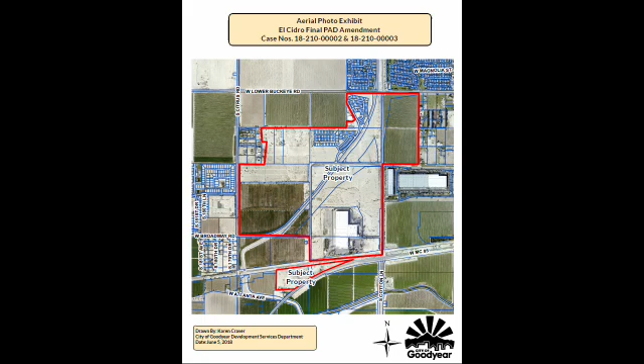The El Cidro PAD, to start with the big picture, is the property outlined in red. It extends from Lower Buckeye on the north to south of MC 85, and from Citrus on the west to west of Cotton Lane on the east. This is the land use plan for El Cidro, primarily residential with some commercial, industrial, and mixed use.

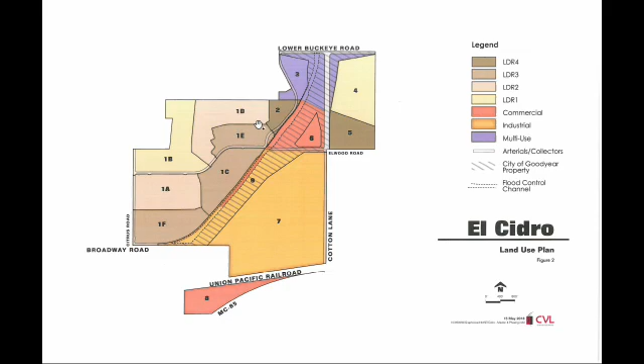Beazer Homes has purchased parcels 1D, 2, and 3. The amendment they are requesting is in just a portion of 1D. Using the same boundaries as the previous map, this covers all of 1D, 2, and 3, but the 18-foot rear yard setback reduction from 20 feet they are requesting is only on this parcel, which is actually phase 1A of parcel 1D. So out of everything on the aerial, the amendment we're discussing tonight is just within here.

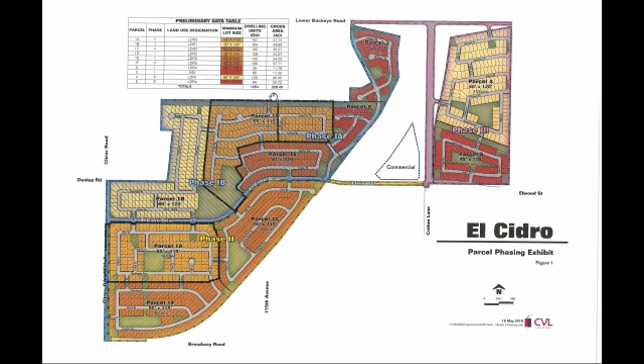This is the land development standards for all the residential. They are proposing, just in this one area, to reduce the rear yard setback from 20 feet to 18 feet on parcel 1D, phase 1A. As the footnote shows, this will only apply to one-story homes. They have a new 75-foot long product that won't fit on the lot from the front setback line to a 20-foot rear setback, so they need to encroach 2 feet and have an 18-foot setback. All their two-story homes will remain at the 20-foot setback. So just that one section of the table is pertinent to this amendment tonight.

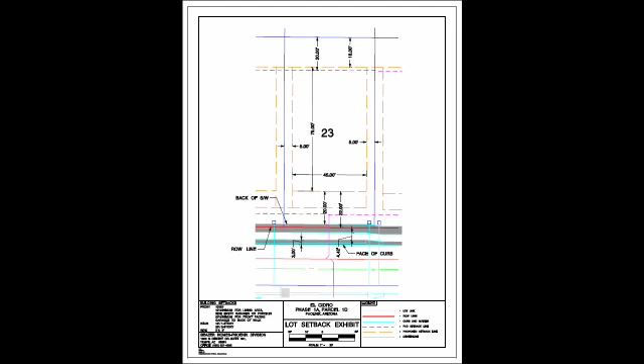This is a graphic showing what it's going to be. Rather than being at the 20-foot setback line back here, the home will go to the 18-foot setback. Because we are pleased there's going to be another home product added to the diversity of products offered in this community, we are supportive of this change, and we hope you can support it as well.

As Katie said, this allows us to continue separating out the two staff reports from the one, and the ordinance stipulations, getting those all separated as well. For this individual item for Beazer, we are hoping to move forward so they can go to council before break and get this approved, so we can add to the diversity of homes in El Cidro. I'd be happy to answer any questions.

Are there any questions for staff at this time? No. I take it the applicant is present.

Would the applicant like to speak or address the commission at this time? For the record, your name and address, please. Jeff Bliley, 701 North 44th Street, Phoenix, Arizona, here on behalf of Beazer Homes.

I want to clarify one reason we're doing this: we've done a number of PAD amendments on El Cidro, and a few years back one stipulation was adding detached sidewalks to the project. Originally it had sidewalks attached to the local streets, but now there'll be a boulevard, so it's detached. That caused the need for this, because the front yard setback is measured from the back of the sidewalk, and creating that 4 to 5 foot boulevard pushed the sidewalk farther up. So the options were to reduce the driveway length.

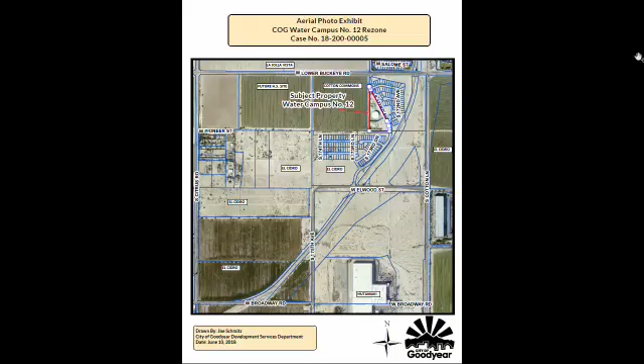So to give you a perspective, this is the Water Campus site originally, and the area immediately south was going to be platted with 11 lots around a cul-de-sac. But the city purchased the property before the final plat was finalized, and so that existed as Tract F, part of Parcel 3, and that's what the city acquired. You can see where it fits in with the balance of the El Cidro development.

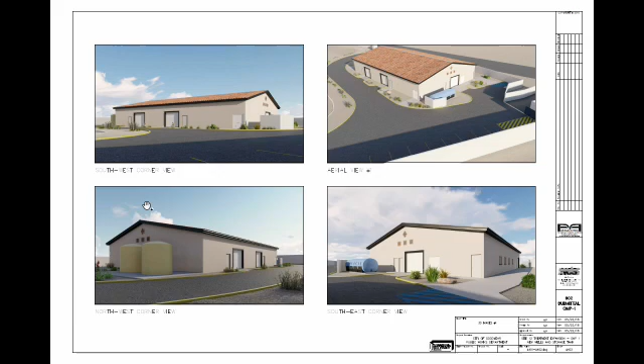This is a conceptual rendering of what the building might look like. Most of the building will be below the height of the perimeter wall when viewed from the outside, but during the site plan review process, they'll do the design review too, and they've already made some effort to make the building look more residential than industrial. That's just another view of it, through kind of an aerial perspective.

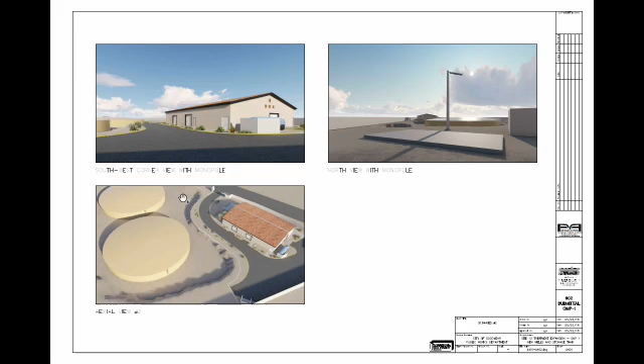The site will be entirely surrounded by a concrete block wall that matches the style used in El Cidro. Landscaping will be installed along the frontage of the site along 173rd Avenue using the same plant palette used by El Cidro on the other side of the street.

Staff has reviewed it in the context of the criteria we use to review rezonings, and we find that it is compatible with the surrounding area. We have recommended approval of the rezoning as requested.

Thank you, Joe, appreciate it. Is there any questions for staff at this time? None? We do have representatives from the Public Works Department and Engineering Department if there are any questions of the applicant. Does anybody want to ask the city some questions? No, I'm good, why their water bill's so high, or? With that, then, is there any speaker cards on this issue, or any member of the public that would like to address the commission on this?

Seeing none, I will close the public hearing and ask for a motion.

Mr. Chairman, I'd like to make a motion to approve case number 18-200-00005. Is there a second? Second. It has been moved by Commissioner Maloney, seconded by Commissioner Steiner, to approve the City of Goodyear Water Campus number 12 rezone. Is there any discussion?

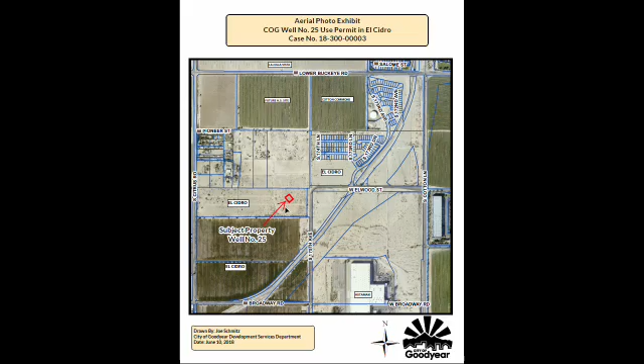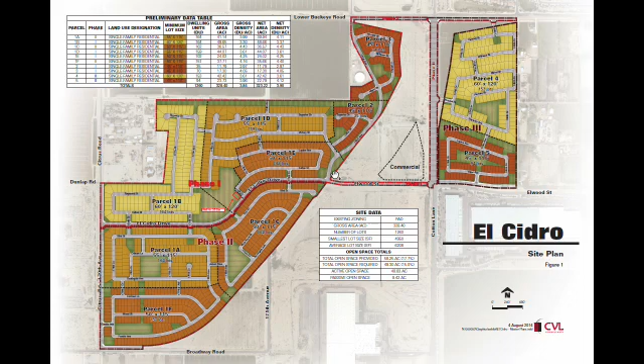This is the same map you saw before, except now we're focused on the well site, which is located right here. The site is about 100 by 100, and they've nestled it in the corner of El Cidro Drive and the local street, in an area that's going to be open space and a retention area in the development. So it kept it away from the surrounding area, and you can see where it would fit within this open space parcel within the El Cidro project.

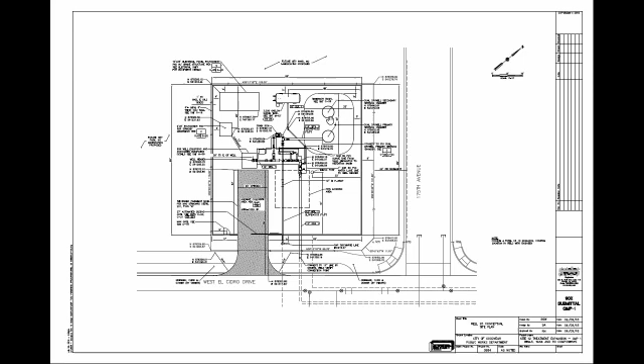This is the site plan for the well itself, and it outlines the equipment. Everything on the site will be below the height of the perimeter wall, and the perimeter wall they intend to use will match the perimeter walls planned to be used in the El Cidro development.

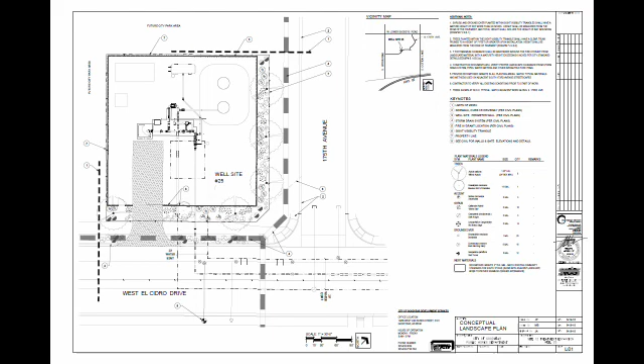We have evaluated this item pursuant to the criteria we use to review use permits, and we find it to be compatible with the surrounding area and appropriate at this location. We have recommended approval of the special use subject to the stipulations outlined in your agenda packet.

Was there any questions for Joe at this time? Is there an existing well there? Not at this time. I believe they've drilled a pilot well just to test it, but there is not a well on the site at the present time. Okay, this might actually be for Public Works then. Obviously, that well would feed the water facility up above.

Good evening, Chair, Commission members. My name is Barbara Chappell. I'm with the City of Goodyear Public Works Department, and the intent for this well is to feed the Water Campus 12.

Maybe I'm not aware of this, but why wouldn't you dig the well inside of the Water Campus, saving building another structure so far from the campus? There is an existing well inside the Water Campus. The project is to add this well, another well that will be up on Lower Buckeye, and those two will transmit to the central treatment location at the water treatment facility, Site 12. So the building is being added and the RO treatment is being expanded as part of this project.

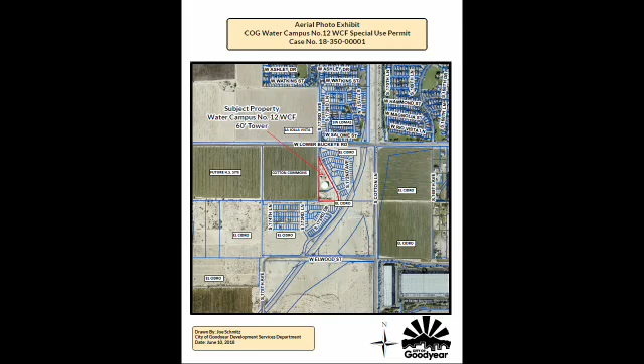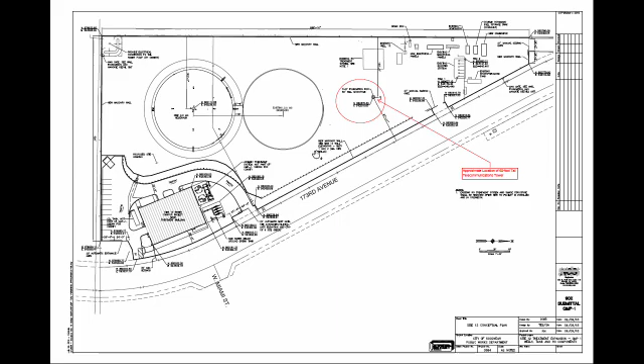The tower itself would be located approximately at this location, which places it about 120 feet from the west property line and about 97 feet from the east property line. But then there's an additional 60 feet plus in the 173rd Avenue, which makes it exceed the minimum requirement of providing a separation of 2 times the height of the tower from any residential district.

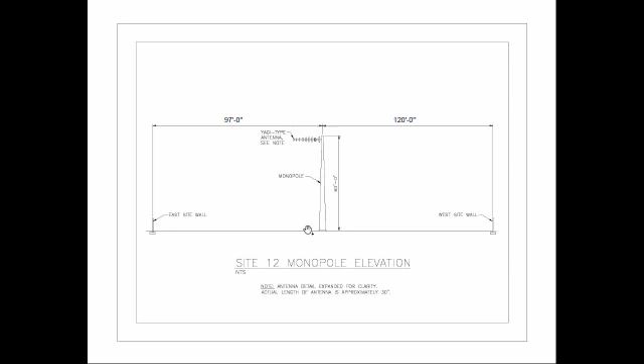This is the site plan for the landscaping again with the communications tower at this location. The wall around it will shield some of the monopole, but it'll be 60 feet tall. It'll have a single Yagi type antenna on it. The size of the antenna was exaggerated on this drawing—it's actually only going to be about 30 inches long, so it won't look exactly like this.

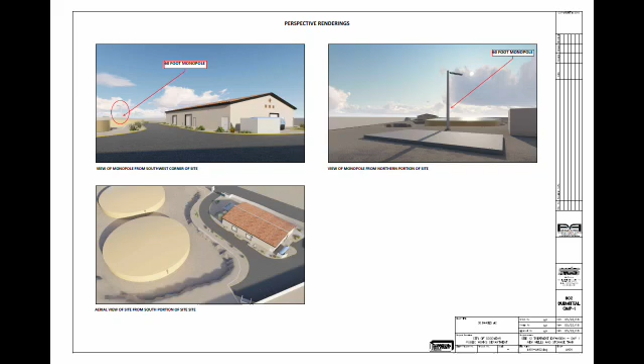So a special use permit is required for any wireless communication facility. The Public Works Department filed this application so that they could establish communications with the other portions of their SCADA system that they use to control and communicate between sites. Staff has reviewed this application and finds it in conformance with the criteria for wireless communication facilities, as well as the criteria used for special use permits. With that, we have recommended approval subject to the stipulations in the agenda material.

Thank you, Joe. Any questions for staff?

Is this a standard monopole, or is there something different about this particular one, size-wise or location-wise, that you have to worry about? Chairman Bray, Commissioner Kish, typically the wireless communication towers you see around town are about 65 feet tall or a little taller, with more substantial antenna arrays than this type—usually a 3-array antenna with 4 antennas in each array, each about a foot by 8 feet. So this one, when we review wireless communication facilities elsewhere in the community, we've often required them to be camouflaged and made to look like palm trees. But this one has more minimal equipment, so we felt it was minimally intrusive and wouldn't impact the surrounding area. I'd also point out that on the WAPA easement just to the south, there's a series of fairly large electric transmission towers present in the area, which will make this one look small.

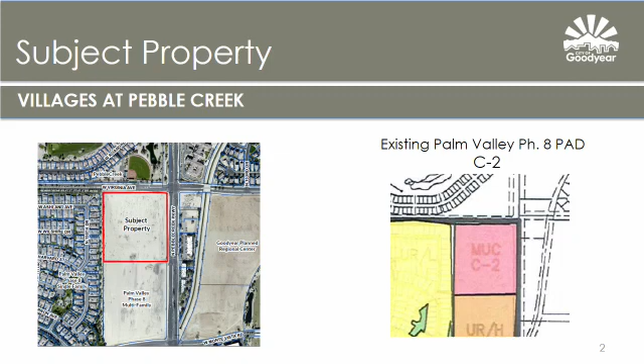The request tonight is to pull the subject property out of the Palm Valley Phase 8 PAD and create a singular PAD that would allow for a single-story multifamily residential facility called the Villages, or currently called the Villages at Pebble Creek PAD.

Excuse me. This is a comparison of the development standards to the city's MF18 standards. You'll see the one-story height restriction, and the proposal also reduces the maximum building coverage.

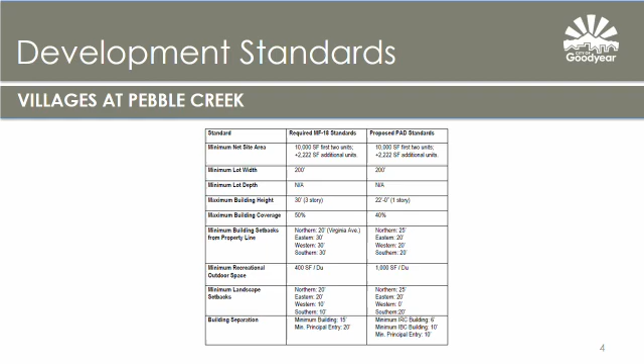The outer boundaries of the property are made up of the backyards of the units, so those building setbacks will contain backyards. This is part of the reasoning for the deviation in side setbacks. In a standard garden-style apartment complex, these setbacks usually contain parking spaces, drive aisles, or buildings themselves, but in this circumstance, those setbacks are just backyards of single-story units. Therefore, in a fashion similar to development standards we've recently seen, staff finds these deviations agreeable.

This is an image of the conceptual site plan. Just like the Christopher Todd PAD last time, I'll reiterate that this PAD does not approve a site plan, only development standards. On this site plan we have 184 units, and there's a stipulation that restricts the amount of units to 184. These units are made up of 1, 2, and 3 bedroom units. The main entry is off Harvard Street.

We have Pebble Creek running along the property. Harvard Street is already signalized, and the leasing office is located at this main entry. There's a second entrance and exit on the north of the site, which lets out onto Virginia Avenue. This would require a median cut on Virginia to allow a left turn.

If you're coming westbound from Pebble Creek, it allows you to turn left into the complex. The exit at this site is restricted to right-out movements, so if someone's leaving the apartment complex, they would have to make a right-only turn. They wouldn't be able to go left on Virginia Avenue. The traffic study for this rezone was reviewed by the city's engineering department and approved. The study anticipated a decrease in trips generated compared to commercial use.

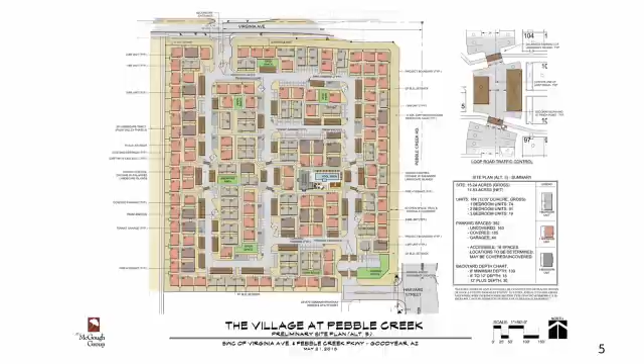On April 25th, the city hosted a neighborhood meeting for the applicant to receive public input. About 8 residents attended this meeting. The residents were from the adjacent Palm Valley neighborhood, and their concerns were related to density, noise, and traffic. The applicant also met with the Portales HOA for an additional meeting, and staff received a letter from the HOA in support of the zoning request.

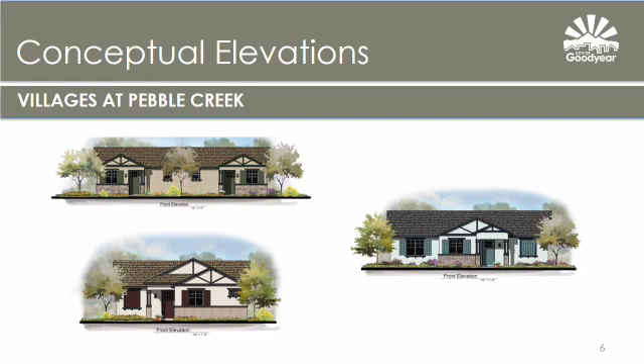Based on the city's requirements for zoning and engineering standards, the applicant has demonstrated compliance. Therefore, staff is recommending approval of the action. This concludes my presentation for you tonight. The applicant is here and has a presentation as well.

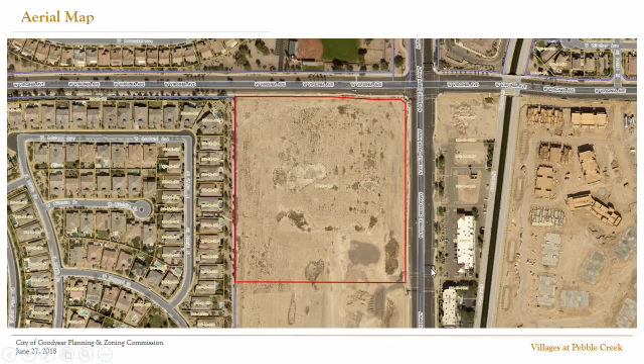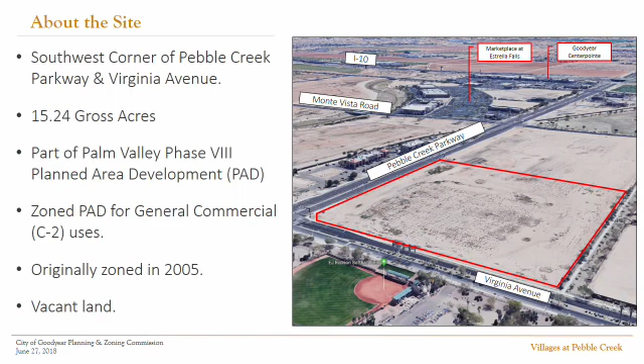So this is just a perspective shot. You're looking northwest here, towards the Pebble Creek community, and just to the west is Portales. Here's another one looking back southeast, towards I-10, Marketplace at Estrella Falls and Goodyear Centerpointe in the distance, with Monte Vista Road a little bit to the south.

So I wanted to walk through some historical aerials just to demonstrate the pattern of development that's occurred in this area and why this project not only makes sense, but will ultimately be a big benefit for the community.

The reason I bring this up is because through the period of time it took residential development to reach this area and develop with all the single-family residential around it, you had a coinciding decrease in the demand for commercial and particularly retail commercial uses, to the point where now with online retail and all the other outlets that make retail sales possible, there just simply isn't the demand for commercial real estate that we once saw.

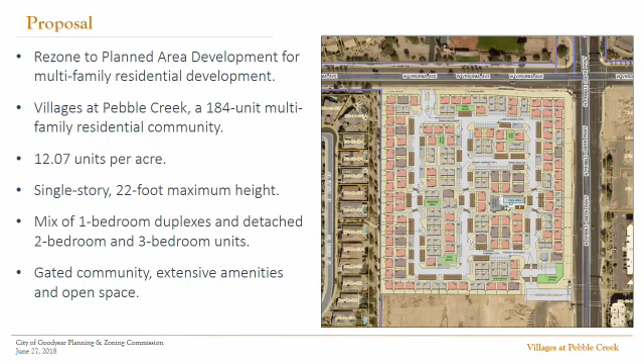The actual heights of the individual units at the top of the pitched roofs, which you'll see in some elevations later in this presentation, is actually 16 feet. It is a mix of 1, 2, and 3 bedrooms, and it will be a gated community with 2 entrances off of Virginia Avenue and Pebble Creek Parkway.

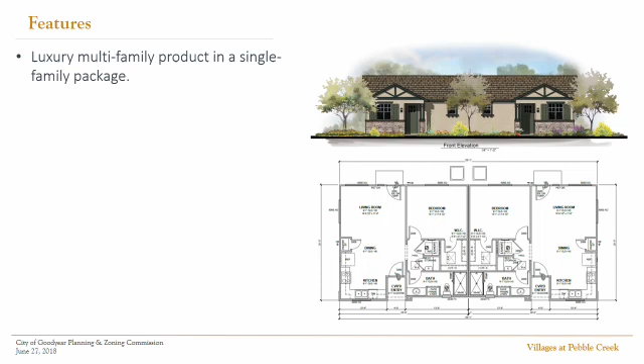So this is going to be marketed and sold as a luxury multifamily product. We're talking granite countertops, stainless steel appliances, high-end finishes. This is targeted towards a more luxury multifamily property, but in a single-family package.

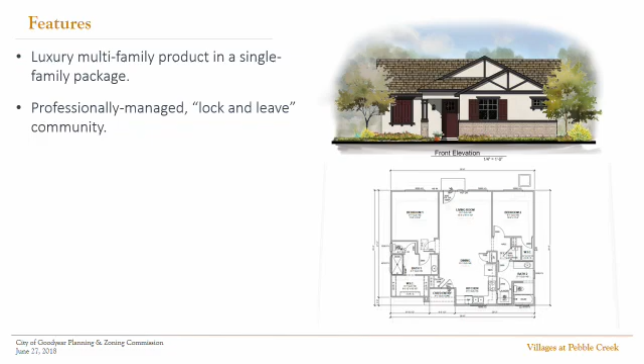With the exception of the one-bedroom units, which are duplexes, the 2 and 3 bedroom units are detached, so they will be more like a single-family or casita-style product than your traditional apartments. It will be professionally managed, it's a lock-and-leave type of development, with bungalow-style units and pitched roofs.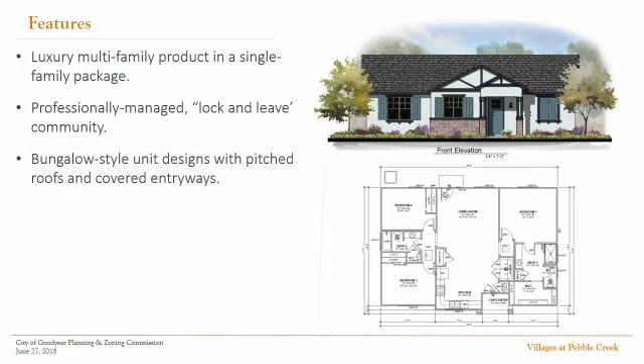Here you see the 3-bedroom unit. There will be substantial covered parking, and garage units will actually be available for lease. And you can see here one of the garage facilities, which will have 4 garages within each one.

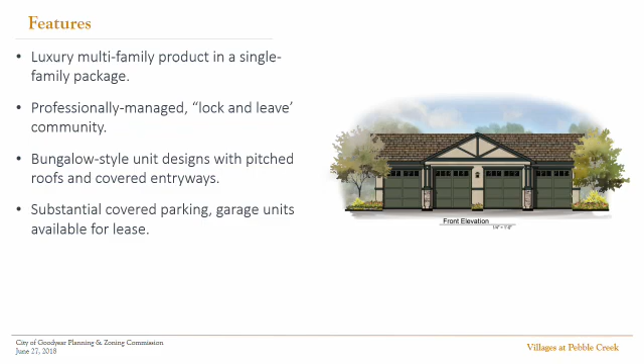As I mentioned, high quality finishes and materials. So as you'll see through the next couple of slides, these are the materials you'll see on the exterior: stone facades, desert tones, but in more of a bungalow style architecture than the Southwestern architecture you may be used to seeing.

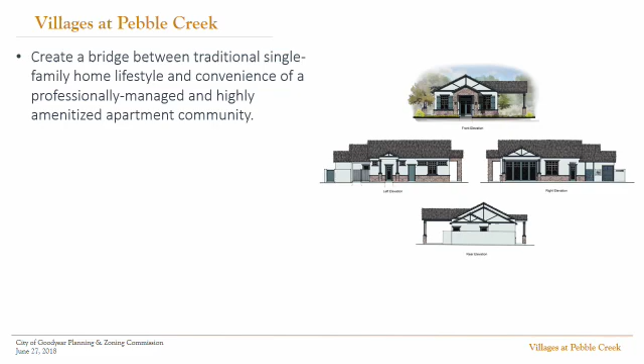As I mentioned, this is designed to create a bridge between traditional single-family home lifestyle with the convenience of a professionally managed and highly amenitized apartment community. It offers the independence and privacy of a single-family community without some of the maintenance obligations of home ownership, and it fulfills a housing need sought by a number of demographics who will find this product to fit their needs.

Particularly, this is going to be marketed towards young professionals, military personnel, empty nesters, and retirees. Given the proximity to Luke Air Force Base, when you have people doing a permanent change of station, a PCS to a base for 3 years, they may not be in a position where they want to buy a house or risk having their house drop if the market falls out. A product like this gives them the independence of a single-family configuration without the obligations and risk of a mortgage.

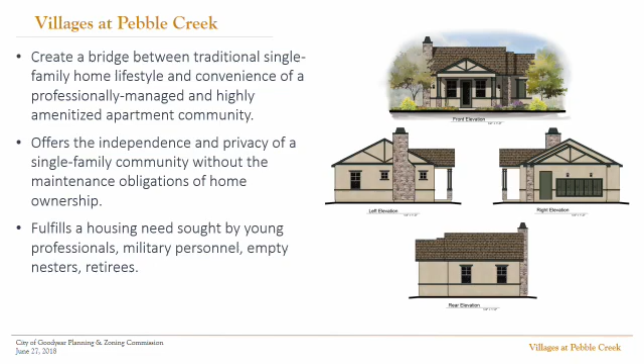Alex walked through the development standards, so I'll be brief. We're restricted in height to 22 feet. Under the current C2 zoning, you could put up to 56 feet on that property. The maximum density we're requesting is 13 dwelling units an acre, but the actual proposed on the site plan is just less than that at 12 units an acre. The maximum building coverage is 10% lower than what would currently be permitted with the commercial zoning.

We're proposing a minimum recreational outdoor space of 1,000 square feet per dwelling unit. So for every dwelling unit on this site, there's 1,000 square feet of open space.

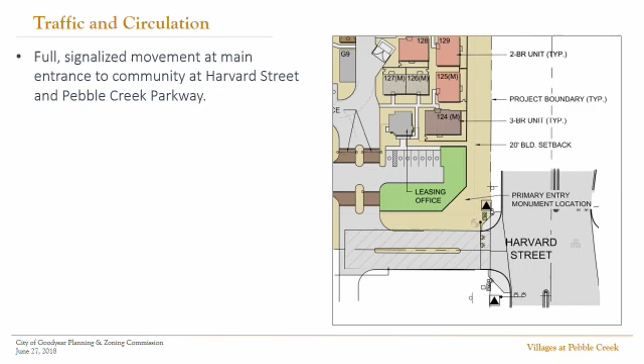I know traffic has been a concern. That's one of the things noted at the neighbor meeting, so I think it's appropriate to walk through that quickly. As Alex noted, there is a full signalized movement at the main entrance off of Harvard Street. There will be a 3/4 movement at Virginia Avenue. This will be a resident-only entrance and exit. You won't be able to turn left onto Virginia Avenue coming out of the project.

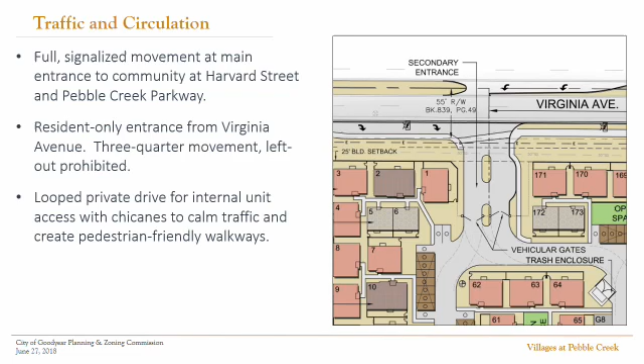As you saw in the site plan, it's got a looped private drive for internal circulation, so there's no parking and there are no roadways on the exterior of the complex. So things like headlights shining into someone else's backyard, you're not going to see that because everything is screened by the units.

Alex also noted that this is a significant decrease in the traffic you would expect to see with a comparable commercial development under the existing zoning. With the traffic study we did, we found it's actually almost 6,000 fewer average daily trips with what we are proposing versus a commercial strip center, which is what you would typically see with this type of development.

30 seconds left. Oh, boy.

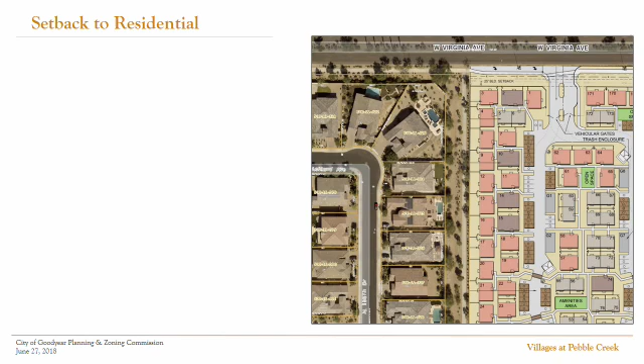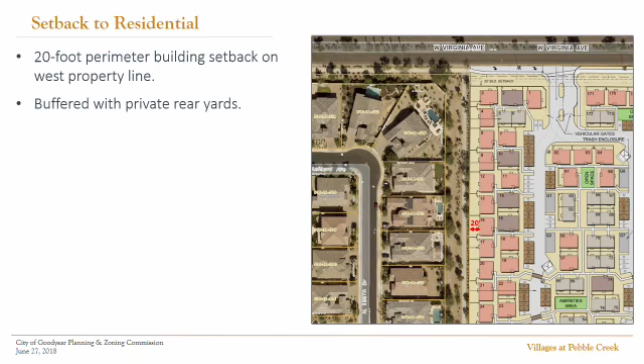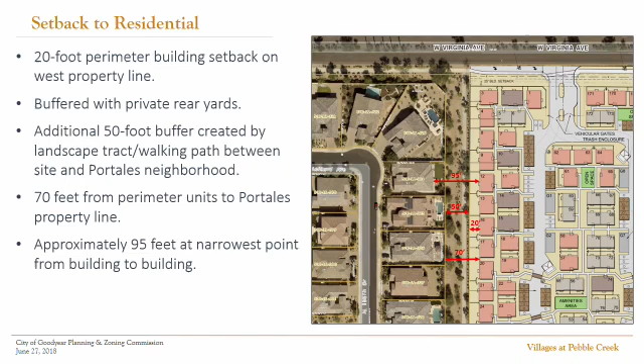I will briefly walk through the setbacks to residential. As Alex noted, it is a 20-foot setback along the perimeter. That 20 feet will have backyards abutting the adjacent residential community. There is also a 50-foot landscape tract between us and Portales, so that brings it to 70 feet. But then there's also an average 25 to 30-foot setback for those single-family homes. So the actual distance you'll see from our closest unit to the closest home in Portales is about 100 feet, which is a larger separation distance than you would see from 2 homes back-to-back within Portales. Time, and I guess I'll stop there.

Does anybody have any questions for the applicant at this time?

I did have a question regarding this being multifamily. There's no age restrictions on this community, is that correct? I'm sorry, there are no what? Age restrictions, so it's not a 55-plus community. No. So has there been any thought to where children will be picked up from buses, those type of things? Because you're going to have families in here, and I don't know what Portales has for children to walk through on these walkways. I just didn't know if there was thought to where a bus would pick up children or where they would go for school.

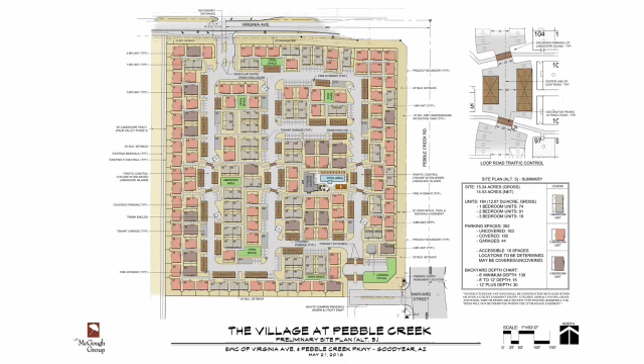Chairman Bray, Commissioner Kish, I would merely be speculating at this point, but I would assume that the bus pickup would be at the main entrance at Harvard Street. Given the requirements for a turnaround for trash and fire trucks and things like that, I imagine those would have to accommodate a school bus as well, but that would be worked out at later stages of development with traffic and engineering. Thank you.

Any other questions for the applicant? Perfect. Thank you, Mr. Tate.

I will now go to call to the public. Is there anyone that would like to address the commission at this time, or are there any speakers cards, Heather? None? Okay, so here's how we're going to do this, just to make sure the rules are clear.

You are all welcome to address the commission. Make sure you fill out a speaker's card. You can come up before you do it, just make sure you do it afterward. We need your name and address for the record. You'll have 3 minutes to address the commission, and Katie will be our timer for this evening, so she'll let you know when you're getting close to the end of those 3 minutes.

Typically we take the comments, and there isn't back and forth on questions. We just consider your comments and then move forward. So with that, ma'am, you were excited about getting up here, so we'll take you first.